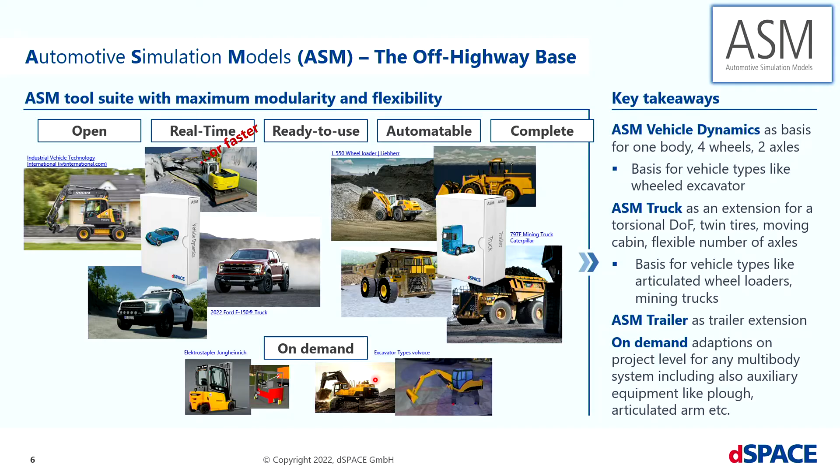Coming from the vehicle multi-body simulation to our other tool, AURELION. AURELION, as an Unreal-based 3D environment, gives you not only the possibility to have a nice view on the current simulation status of the vehicle in your scenery, it is mainly intended to open the space for ray tracing-based sensor simulation. Which sensors are available? Of course, it's the radar, the camera, and the LiDAR. Together with these, also solutions for ultrasonic sensors are available.

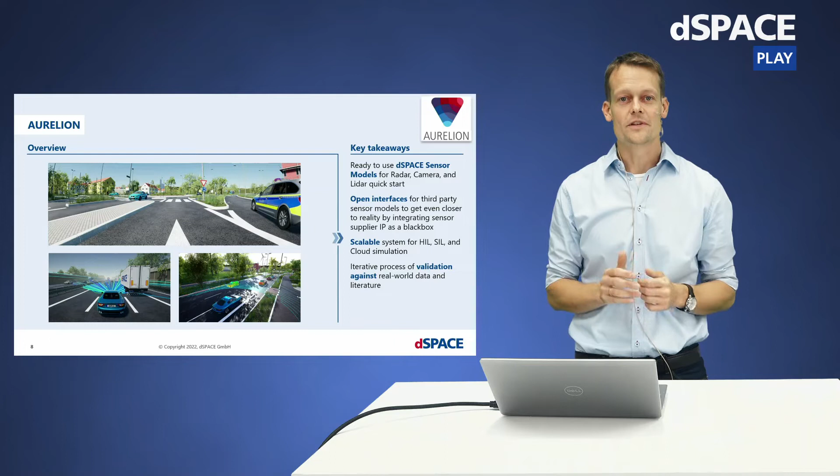Here are a few facts about our simulation features, which are also relevant for your off-highway application. Let's take the camera. For this passive sensor, you must simulate the environment, the lens, and the imager of the camera. Physically based rendering makes the materials in a 3D environment as realistic as possible. Calculating the lens distortion before traveling to the imager is as important as respecting a Bayer color filter. In case of the radar, you can parameterize your TX and RX antenna. A fully polarimetric simulation respects horizontal and vertical oscillations for different radar types, ghost targets due to multipath reflections, and so on. And last but not least, LiDAR, with its parameterizable scan pattern, if it's flash-based or scan-based. In the latter case, also motion distortion is considered due to superimposed movements.

Anyway, there are a lot of features in AURELION which can directly be applied to your off-highway environment. Just define the correct scene, get the correct car, and switch on the sensor simulation. But let's leave the sensor details now, coming back to our question, to our mission. During the last minutes, we got a common understanding of our portfolio. And it seems that there are a lot of useful features already available away from the streets. But which puzzle pieces need to be found? Which parts are missing? I will give you an insight.

Starting with 3D environment simulation aspects.

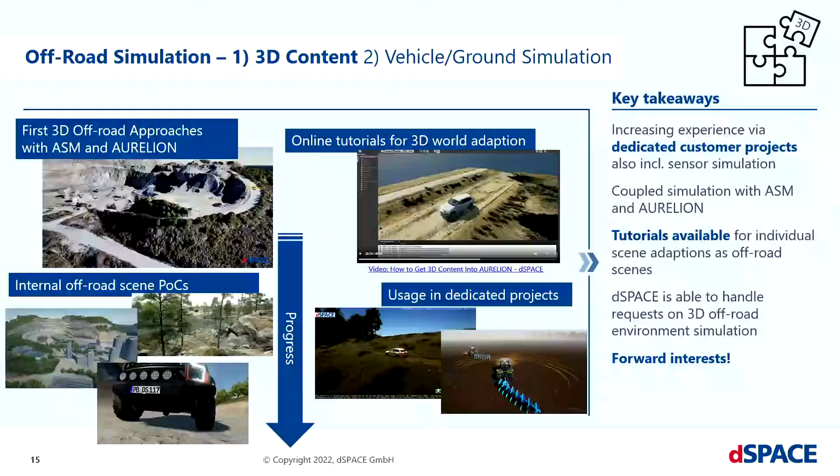In the beginning, we started to combine ASM with an off-highway scene in AURELION, here a mining scene out of South America. Having this, it is clearly obvious that our engineering as well as the customer need to be able to work with the 3D scenery, as off-highway scenes are very individual depending on the industry branch, the architecture of the construction site, and type of vehicles.

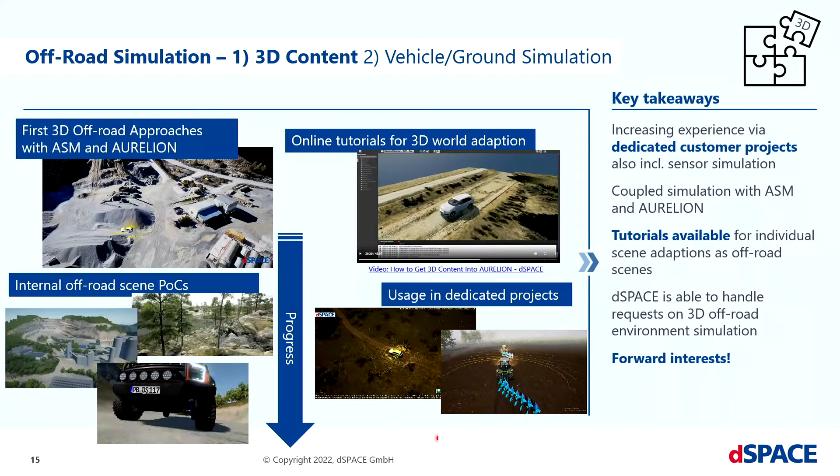So deploying online tutorials is a very good starting point. Besides this, we have ongoing internal proof of concepts to get our own impressions and to enlarge our asset portfolio with 3D content like mining scenes or wilder rocky forest type environments. And last but not least, working in customer projects with our own engineering delivers continuously requirements for real-world use cases.

Moving on to the side of the vehicle simulation.

Quite obviously, someone needs to think about the wheel-underground interaction. As shown in this video, we worked out real-time capable solutions for soft soil modeling, integrating a normal and shear stress model, and combining this with models for the underground and elastic tire provides a good basis for compressing the terrain and deflecting the tire.

On the other hand, you will find tracked vehicle applications from various industries, starting with a chain-driven dynamic model and combining this tracked vehicle with soft soil simulation. Hence, working out the contact point pressures, determining the line loads, the corresponding track line—a very interesting topic where real-time capability is a crucial point, as you have not just the dependencies between the contact points due to the track, but also the number of contact points describing the track line, which influences the calculation effort a lot.

Finally, you need to think about the correct storage of terrain data in the simulation. Triangular irregular network data out of a 3D modeling tool, with its information on varying terrain properties, need to be processed as shown in this video.

Not everything is possible out of the box now, but you see we made a lot of progress, a lot of experience. So let's speak about your requirements to get things running in a project and to fit our future tools to your use case.

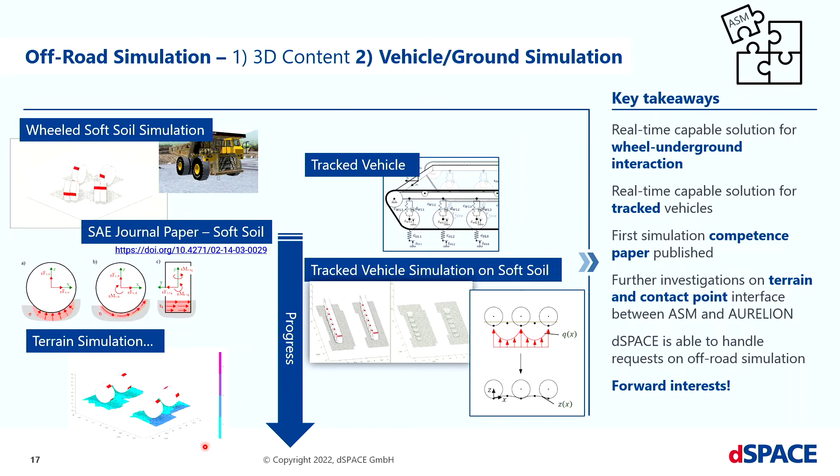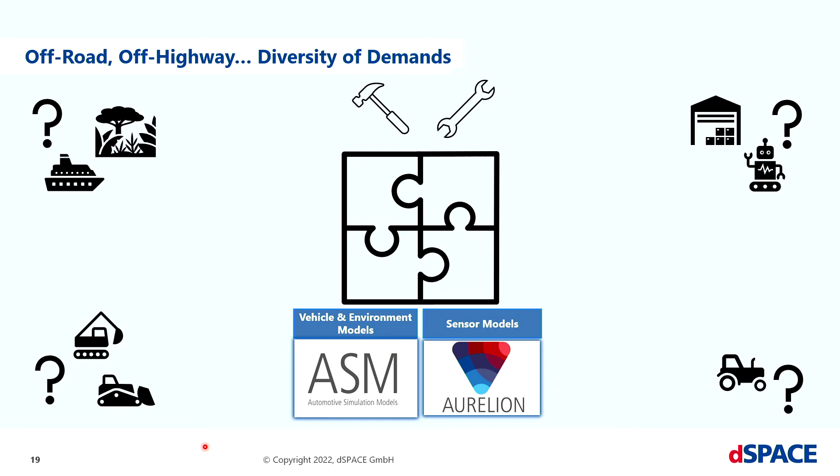So, ASM and AURELION already have the missing puzzle pieces in mind and serve as a good basis to complete the puzzle. At the end, let's have some fun with videos, giving you further impressions of our current capabilities.

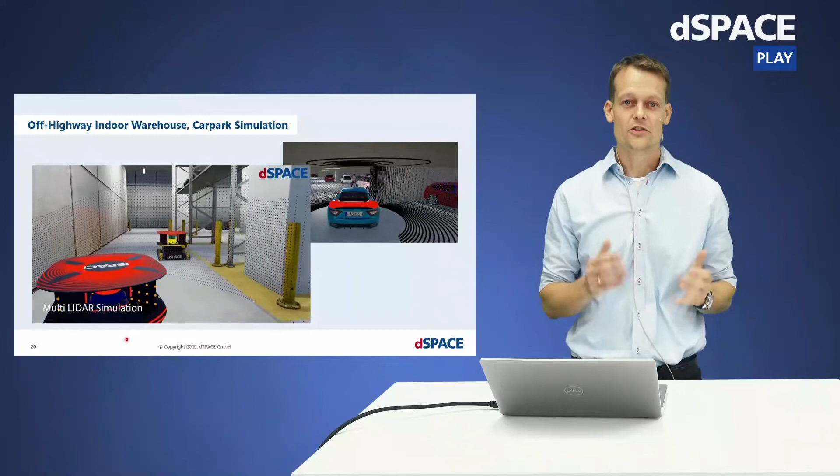Indoor scenes away from ordinary roads like car parks—still very automotive, logistics, or even mining in underground situations. All of them have a common effect: the effect of complete artificial lighting, which needs to be replicated as best as possible for plausible sensor detection.

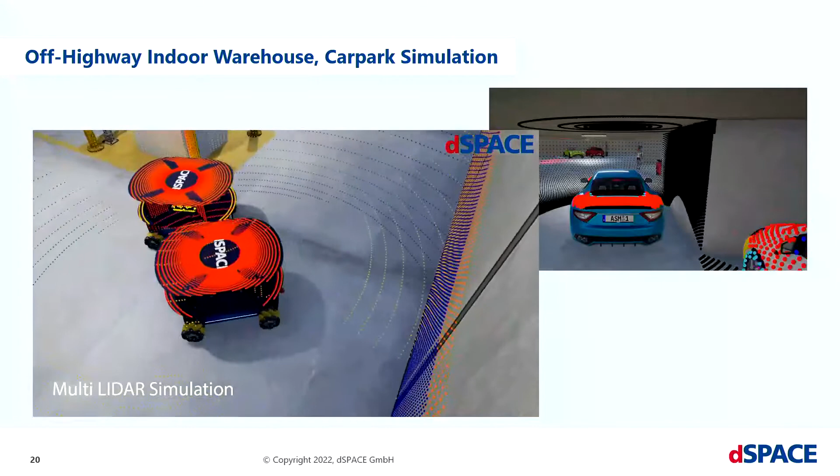Here you also see multiple sensors in your scene, as it might not just be your ego vehicle having a sensor mounted. This is not a problem for AURELION. Please also have a look at the color coding of LiDAR points, which reflect different materials in the scene.

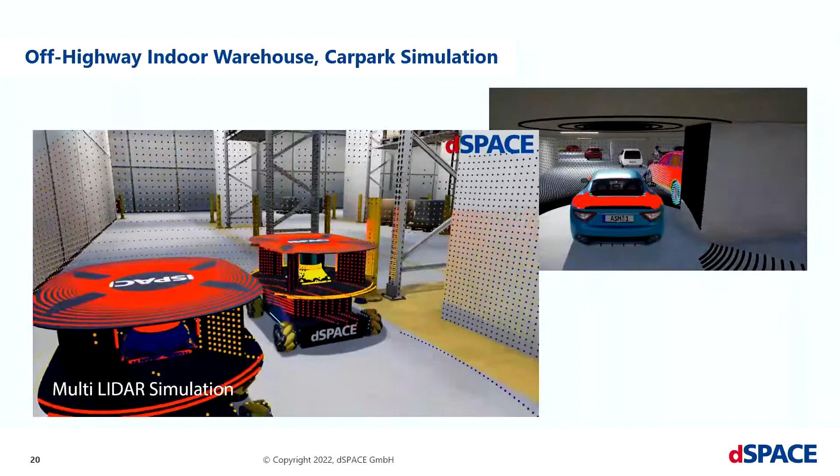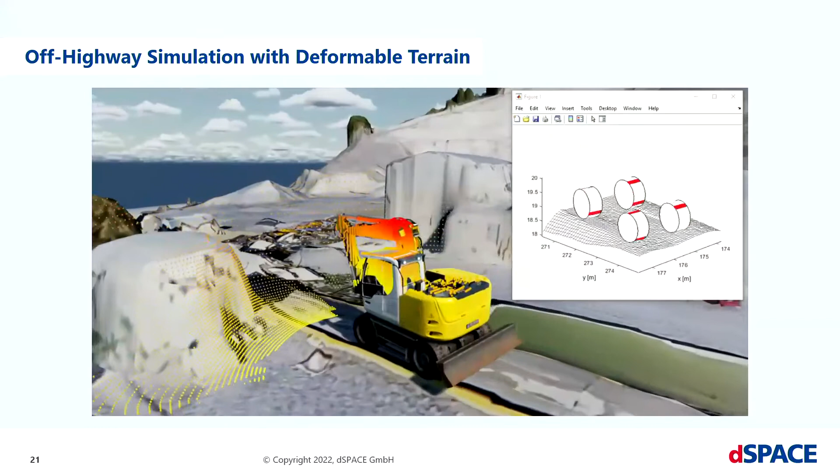The wheel-underground interaction has been extended for soft soil as explained before. In the technical figure, the underground deformation is depicted. This already shows a lot of potential in the field of construction and mining site simulation.

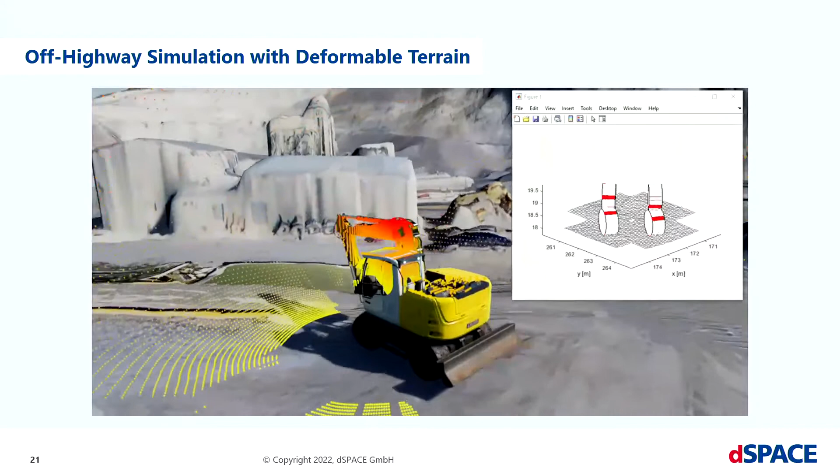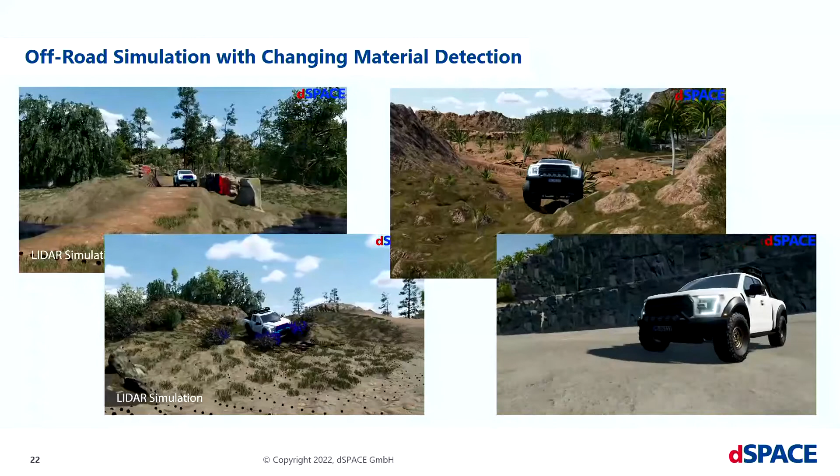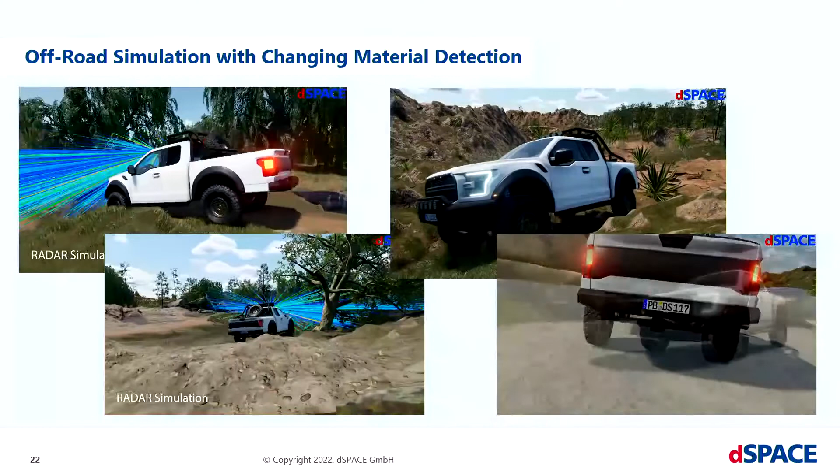From a working situation to an off-road driving enjoyment. Here you can also estimate our potential of ASM vehicle and AURELION sensor simulation in an off-highway scenery. Use cases like these might also be interesting for vehicle dynamic investigation, including terrain detection and adaptation in ride comfort.

Coming to the end of our coffee break, remembering the initial question: mission possible? I would say mission accepted. With ASM and AURELION, we have tools available at dSPACE which already cover a wide variety of off-road demands and serve as a great basis for making further progress and experience in upcoming projects with you.